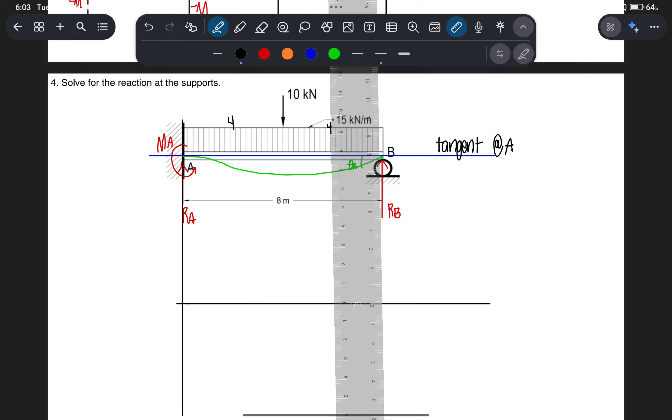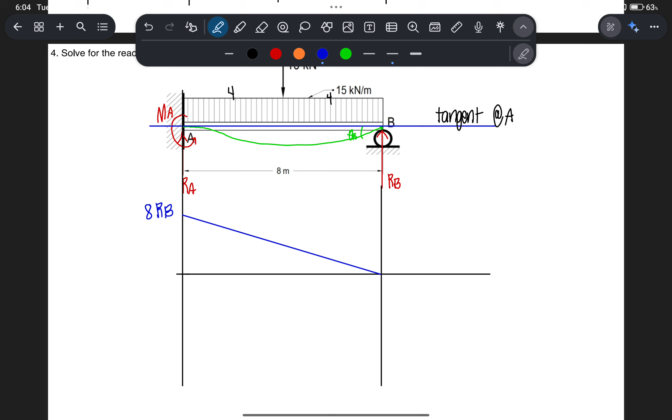So, magkano to? This is 8 RB. Nasundan? O, paano yung uniform distributed load? Si uniform distributed load ay magiging paganyan, no? So, this is equal to WL squared over 2. So, this is equal to W 15. Ano yung length? 8 squared over 2. Magkano to? 15 times 8.

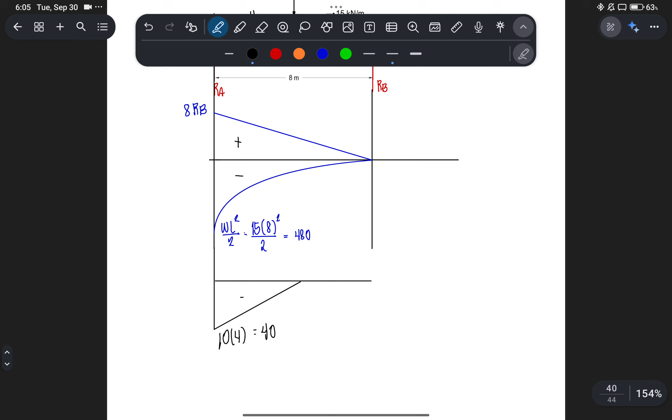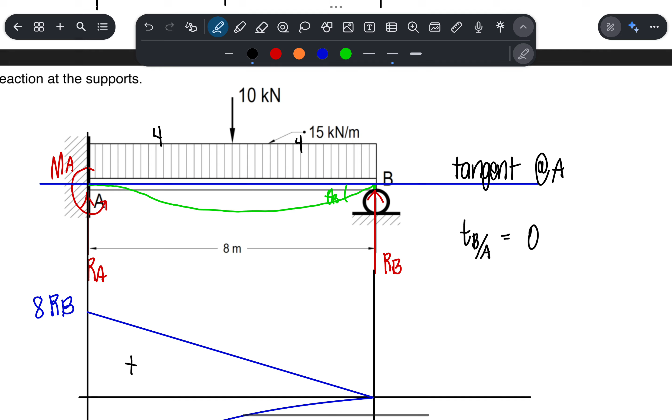Ano yung tangent deviation of B with respect to A? Diba ang sabi natin sa tangent deviation ng B with respect to A, yung distance ng point B hanggang dun sa tangent niya. 0. Therefore, the tangent deviation of B with respect to A, that is equal to 0. Kasi nga, horizontal yung tangent natin dito sa point A. Very good. So, ngayon, the tangent deviation of B with respect to A is equal to 1 over EI multiplied by area under between AB, and then ang centroid niya is from point B.

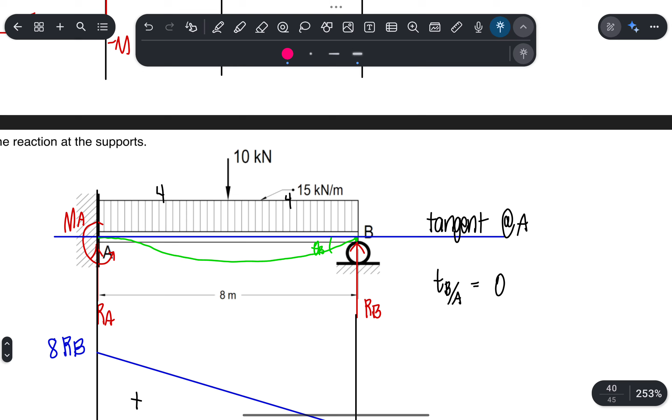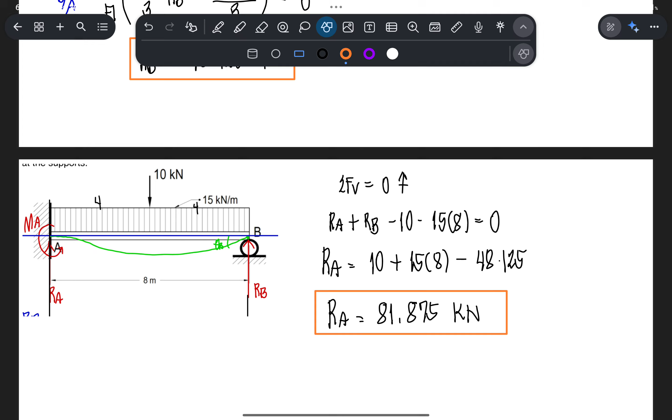So, using summation ng forces vertical is equal to 0. Upward positive. So, we have RA plus RB minus 10 minus 15 times 8. And then, to solve for the moment, summation ng moment at A is equal to 0. Clockwise positive, so we have 10 times 4 plus 15 times 8 times 4 minus RB times 8 minus MA. So, magkano si MA?

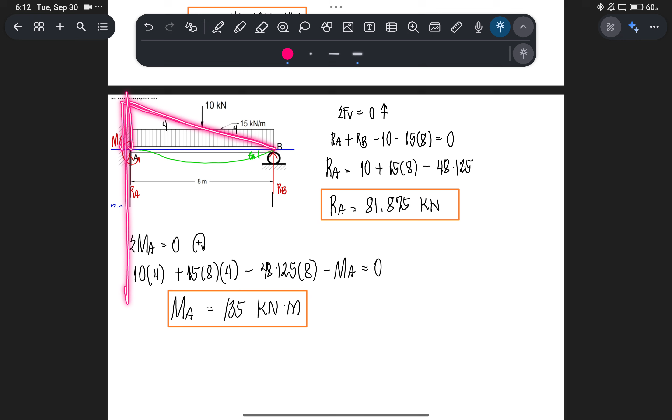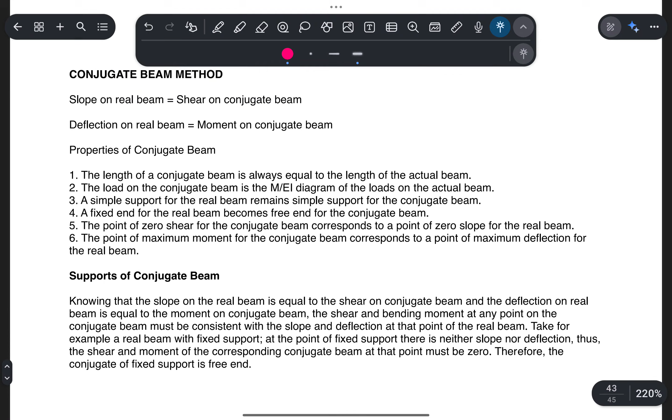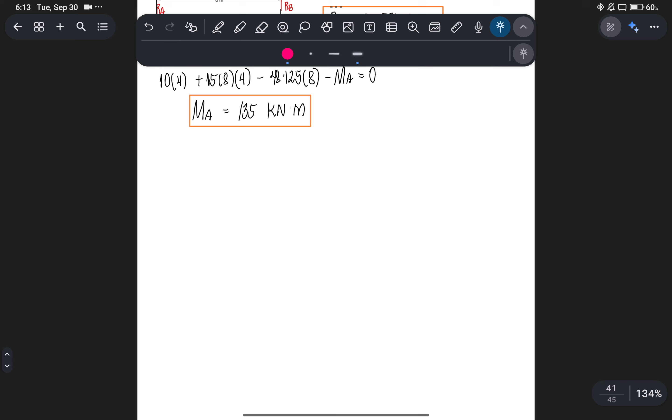Ano nga? Seat work. Wow! Ang laki tulong sa inyo ng seat work. Nagkakaroon kayo idea sa quiz. Okay na? Tapos na?